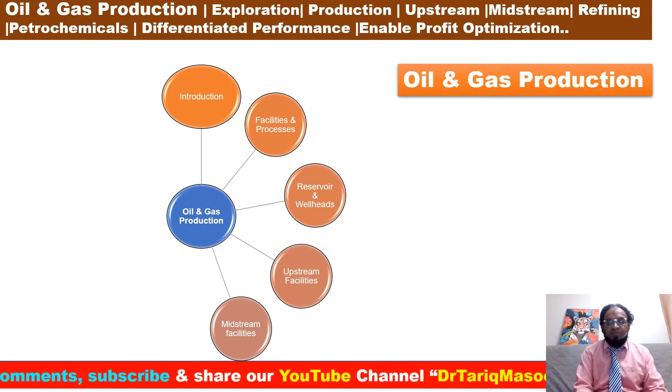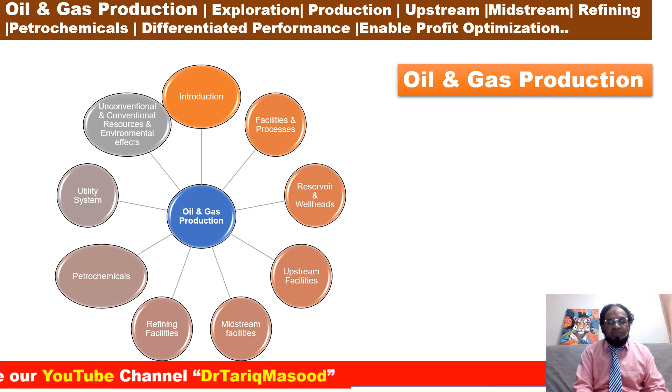Oil and gas production, introduction, facilities and process, reservoir and wellhead, operation management system, upstream facility management system, midstream facilities management systems, refining facility management system, petrochemicals as the moment we are discussing, utility systems, unconventional and conventional resources, and environmental effects.

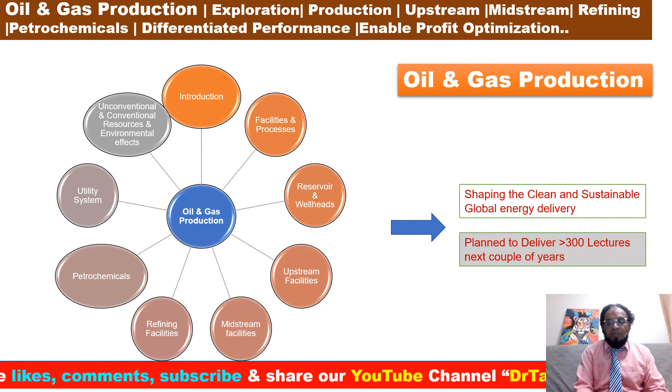What is the ultimate goal? Shaping the clean and sustainable global energy delivery. Planned to deliver more than 300 lectures in the next couple of years.

Oil and gas production, the downstream and gas processing, lecture number 28. Today we are going to discuss olefins, propylene, and butadienes. From my next slide, I'll give you key takeaway points. Key takeaway points, lecture number 28: olefins, propylene, butadiene derivatives we are going to discuss today.

Propylene derivatives. First, we'll discuss polypropylenes (PP), polyurethanes, acrylonitrile butadiene styrenes. First, we'll discuss PP, polypropylenes, various thermoplastic plastics or fibers that are polymers of propylene.

Polypropylene can be made into fibers where it is a major constituent in fabrics for home furnishing, such as upholstery and carpets. Numerous industrial end uses including rope, cordage, disposable non-woven fabrics for diapers and medical applications. As a plastic, polypropylene is molded into bottles for foods and personal care products, appliances, housing, dishwashers, food containers, toys, automobile battery casings, and outdoor furniture, etc.

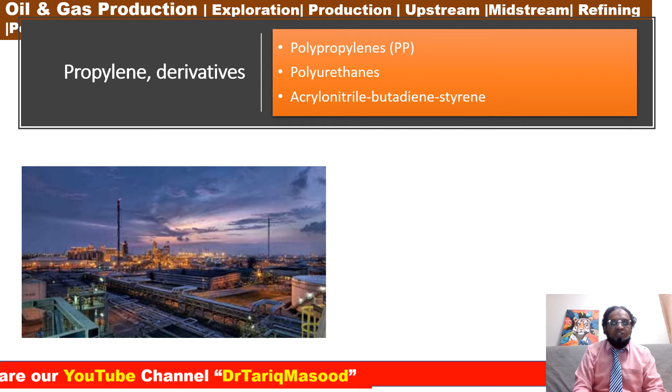Acrylonitrile butadiene styrene, also known as ABS, is a tough, heat-resistant and impact-resistant thermoplastic, with the acrylonitrile providing heat resistance and the styrene offering rigidity. It is widely used for appliances and telephone housings, luggage, sporting helmets, pipe fittings, and automotive parts.

Propylene derivatives, first we'll discuss primary petrochemicals. The olefins will produce ethylene, propylene, butadiene, butylenes, and pygas, and further processed will produce propylene oxide, polyesters, polyurethanes, and polypropylenes here.

The acrylonitriles here will produce acrylonitrile butadiene styrene and polyacrylonitriles. Then it will produce the cumene synthesis of benzene, phenol and phenolic chains, and acetone will produce MMA, or methyl methacrylate. First, polyacrylonitrile is a semi-crystalline one here.

Polyacrylonitrile is a semi-crystalline polymer resin, though it is a thermoplastic, it does not melt under normal conditions. It degrades before melting. It is used to produce a large variety of products, including ultrafiltration membranes, hollow fibers for reverse osmosis, fibers for textiles, and precursor fibers that are chemical precursors for carbon fibers.

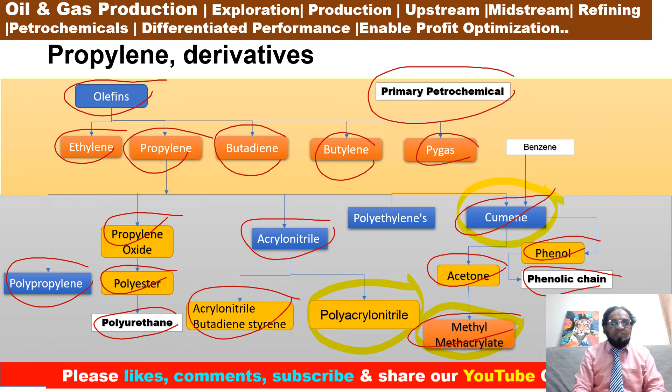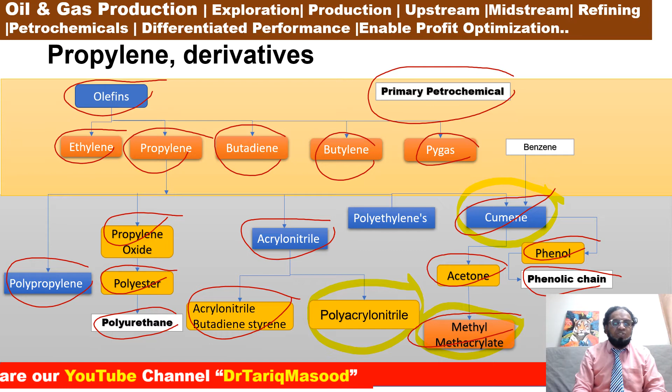Okay, number 3, this is MMA, methyl methacrylate. The principal application of methyl methacrylate is the production of polymethyl methacrylate, PMMA. Acrylic plastics, also MMA, is used for the production of copolymer methyls. Methacrylate butadiene styrene, MBS, is used as a modifier for PVC. MMA polymers and copolymers are used for waterborne coatings such as latex, housing paint, etc.

Now we're going to discuss butadienes, butylenes, and pygas derivatives. First is pygas, then we'll talk about styrene butadiene rubber, SBR. Pygas, or pyrolysis gasoline, is a naphtha range product with high aromatic content, used either for gasoline blending or as a feedstock for a BTX extraction unit. Pygas is produced in an ethylene plant that processes butane, naphtha, or gas oil.

Styrene butadiene rubber, or SBR, is a rubber manufactured from styrene because of its excellent abrasion resistance. It is widely used in automobile and truck tires, as well as for carpet backing and paper coating. About 50% of car tires are made from SBR material. Other applications are in belting, flooring, wire and cable insulation, and footwear.

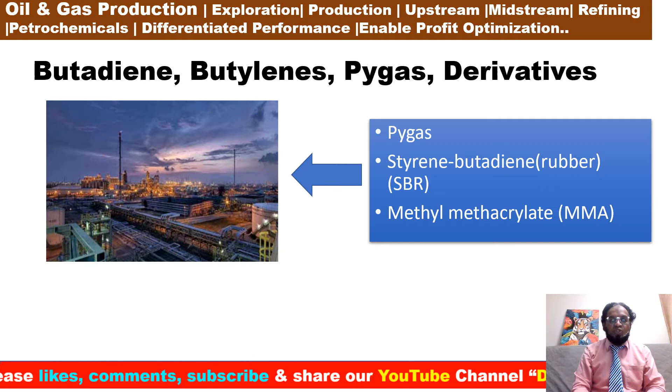Okay, methyl methacrylate, or MMA. The principal application of methyl methacrylate is the production of polymethyl methacrylate, PMMA. Acrylic plastics, also MMA, is used for the production of copolymer methyls. Methacrylate butadiene styrene, MBS, is used as a modifier for PVC. MMA polymers and copolymers are used for waterborne coating such as latex, housing, painting, etc.

Now we are going to discuss butadienes, butylenes, and pygas derivatives. If you can see here, this is my primary petrochemicals diagram. The olefins here will produce ethylenes, propylenes, butadienes, butylenes, and pygas, and further into aromatics.

First we'll discuss polybutadiene. Polybutadiene is a synthetic rubber, a polymer formed from the polymerization of 1,3-butadiene monomers. It has high resistance to wear and is used especially in the manufacturing of tires. It is also used to coat or encapsulate electronic assemblies, offering extremely high electrical resistivity.

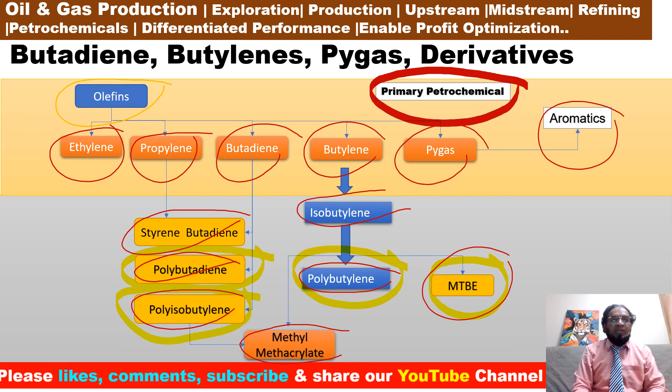Further over here, MTBE. MTBE is used in gasoline to boost the octane rating and decrease toxic emissions in the exhaust. As an octane enhancer, MTBE delivers high octane numbers at relatively low cost. A direct effect of the use of MTBE is reduction of both regulated emissions, CO and unburned hydrocarbons, and unregulated emissions.

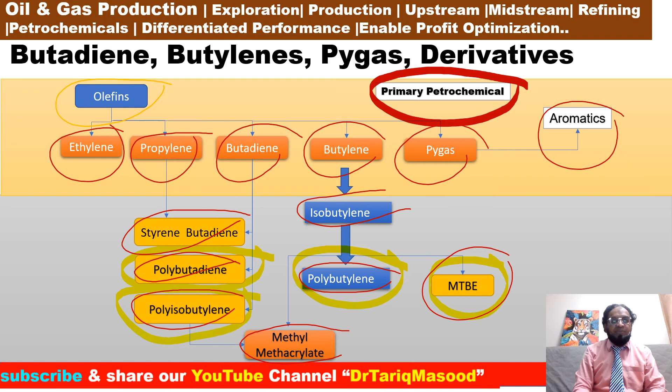Conclusion: what we discussed today includes aromatics, propylene derivatives, and butadiene, butylene, Pygas derivatives.

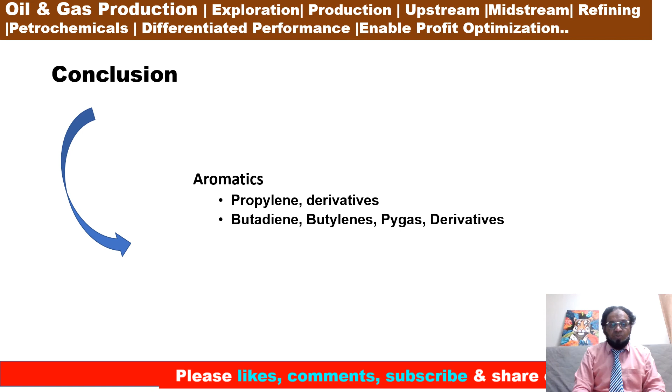Next topic: oil and gas production, synthesis gases.